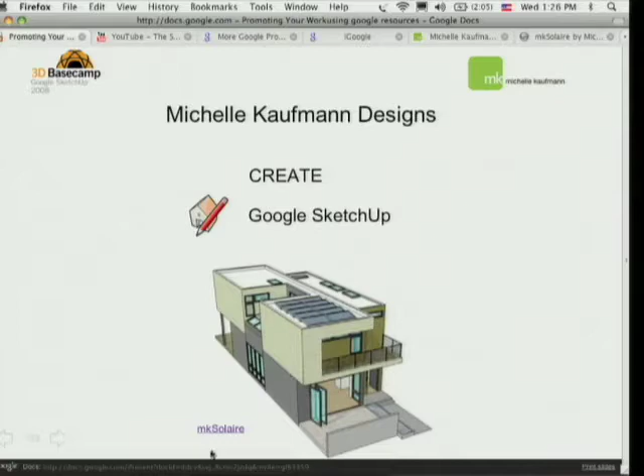But if I click through to the link, that's going to take us to the Google 3D warehouse, where that same SketchUp model design has been uploaded.

I had a conversation actually just a couple of days ago with an architectural designer who I met from Sydney. He had mentioned that one of his hesitations about the 3D warehouse was in terms of giving up his firm's little secret design sauce. There were some intellectual property concerns there that he had.

So I actually also wanted to go ahead and open up this SketchUp model within the 3D warehouse. Just a quick peruse through in case any of you guys haven't seen the warehouse. The 3D warehouse is an online repository where anyone can upload SketchUp models. Anyone with a Google account can upload SketchUp models, and anyone can download SketchUp models.

Here's the little download link that would allow us to download this SketchUp model in SketchUp version 5 format. There is also a place for you to add a description for your models and then some tags. These are all of the searchable keywords that allow you to easily get from theme or from model to other model.

So if I go back to this page, I can download the SketchUp model. I actually already have the SketchUp model downloaded, so I'll just open it up here in SketchUp. Where did it go? I have it open probably. There it is.

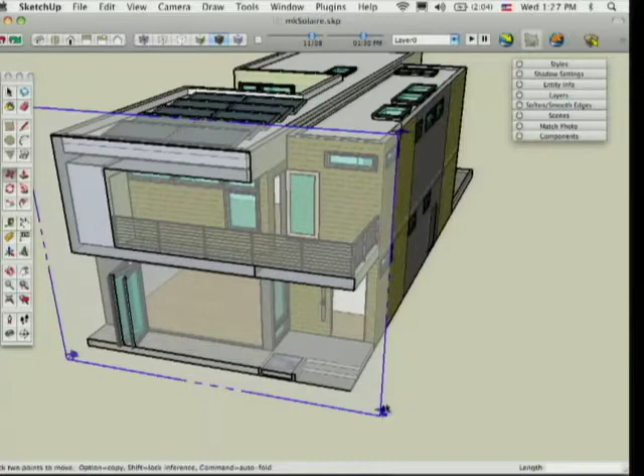I'm just going to turn the shadows off so that I can orbit a little bit faster. And then here I just wanted to take the section tool and cut a quick building section through the SketchUp model just to show you guys that the SketchUp model isn't really giving away anything in terms of construction details or architectural detailing.

It's really just a shell model that's intended to give potential buyers or customers an idea of the space, the internal spaces, the exterior design of the model. In a lot of cases, other folks create strictly exterior shell models where they haven't even modeled the interior walls in detail, or the windows are a lot more two-dimensional. But in this case, it's a really great SketchUp model that allows people to get in and really test drive it.

That's her little catch buzzword, she likes allowing people the opportunity to test drive these models and test drive the designs. So here I clicked the place camera tool, and we're actually inside the SketchUp model taking a look through some of the different stuff. So that's creating content using SketchUp, and now we're starting to look at one of the options in terms of sharing that content.

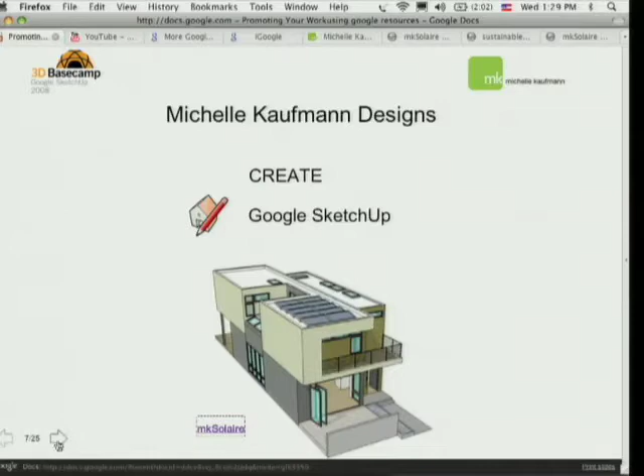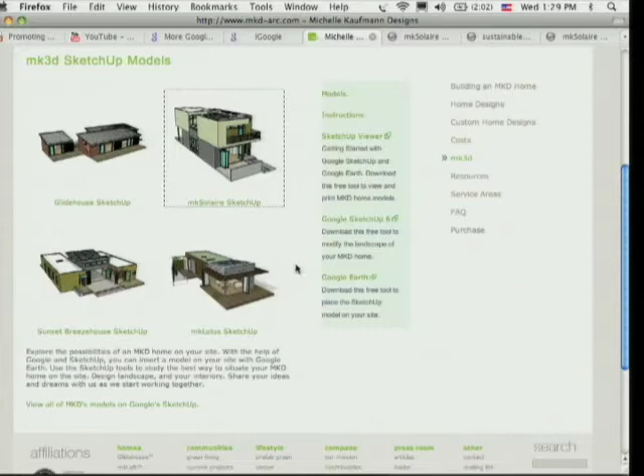So the 3D Warehouse, first and foremost, but then also YouTube, Google Maps, and Blogger. So if I go back over to her website, we can also take a look at the videos that she has posted.

I think there's one on the MK Lotus page. And in this case, when you click on the videos, you'll notice that all of the different videos are YouTube videos that have been embedded on the website.

And if we click through any of these videos, we can either watch them directly on the website or open them up in YouTube.

In this episode of the SketchUp Show, we'll show you how an architect and a product manufacturer are using SketchUp to tackle one of the Green SketchUp Show episodes we produced about Michelle Kaufmann's MK Lotus home, which was on display last November in San Francisco at the West Coast Green Conference and Expo. We're going to introduce you to the MK Lotus home designed by an architect.

So if I pause that and then jump back over to YouTube, take a look at her page on YouTube.

And if we just click on any of these Michelle Kaufmann videos, let's click on this one. One of the cool things about YouTube also is that, just like the 3D Warehouse, where if you're looking at one model it gives you suggestions about other models you may be interested in.

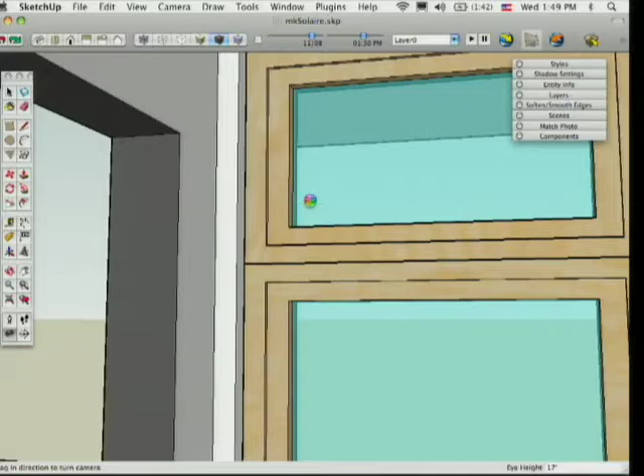If I go back over and grab their model and download that—that one's a cooler looking model. Once that downloads, open it up. And there you go, this is the SketchUp model.

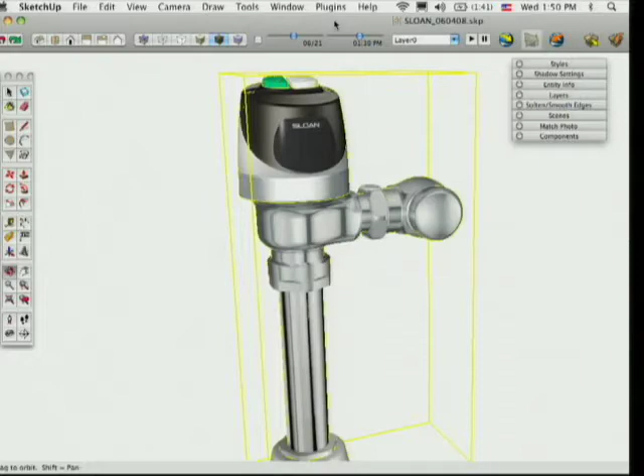The textures were projected from a photograph of the product. I'm not sure, maybe they'll cover that in the photography tutorial happening later, but this is just something we like to do with a lot of our products—building products we put together include the photo textures so it really looks like a more realistic, three-dimensional version of the model.

If I skip back over to Acrobat, I just want to open up the PDF we did for the 2008 products. This one's going to take a second to upload probably because there are so many 3D models embedded in it, but I just wanted to show the 3D files we put together for this year's issue.

So that same straw bale wall panel—here we are in Acrobat, able to spin that around as well. All of these snippets will end up being included in the PDF. From the PDF, they'll all link back to the Warehouse, and from the Warehouse, they'll all link back to either the Sustainable Industries website.

So it's a good way for them to promote the work they're doing with their magazine. But since we're uploading the content as Blue Marble Project, it's also good promotion for us as the authors. People can click on our name and see some of the other collections we've put together and other models we've created for the Warehouse.

Question: In building the Adobe file, are you using Adobe Acrobat, the 3D version, or just any Acrobat? I have Acrobat Pro 8. Acrobat 3D has other tools that allow you to pull models apart, create little animations, and stuff like that.

For what we're doing, it's just a straight copy paste from the 3D PDF that's generated using the SketchUp plugin. From there we copy the 3D file and then paste it into a new PDF document.

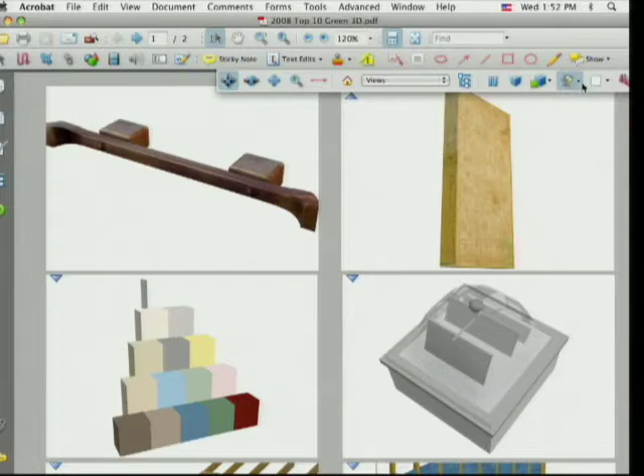We just did a quick WebEx with the guys at Sustainable Industries to show them that process of copy pasting and resizing. The only other thing you want to take a look at in Acrobat is the lighting for each model, because with the lights off it looks pretty dirty. But if you get the right lights in there, there are all kinds of different lighting settings, so it's really just a matter of playing with the lighting settings and then creating a default view so that when the model opens, it remembers those lighting and view preferences.

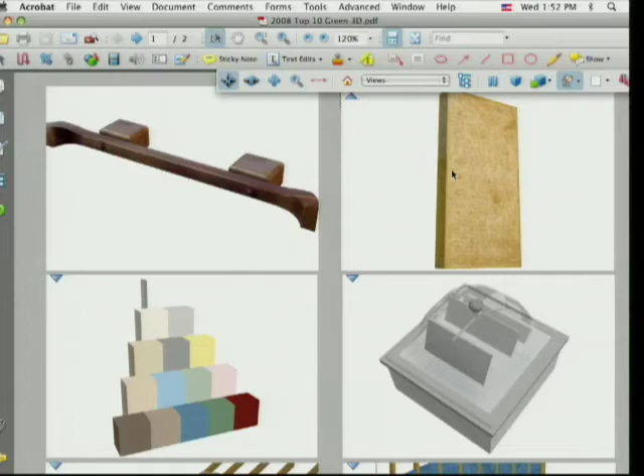We're hoping this will be a really cool interactive way for a smaller trade publication to show how nimble they are in terms of adapting to new technologies and allowing their advertisers to get involved as well. It's of great benefit to the magazine, to us, and to all of the products that were selected.

Green Design Systems barely has a website, because their products are so new and they're really trying to focus on what's important to them, which is the quality of their product. For us to come in and get hooked up through a company like Sustainable Industries and help them out, now they've got information about their products on the 3D warehouse, and available in a 3D PDF format. Compared to the stuff they're using to send out as product literature to advertise to folks, this is going to be really exciting for them as well.

Most of the feedback we've been getting from these building product manufacturers has been really positive. This is a compressed earth block company, so we actually put together a whole SketchUp model that shows how that earth block product is installed.

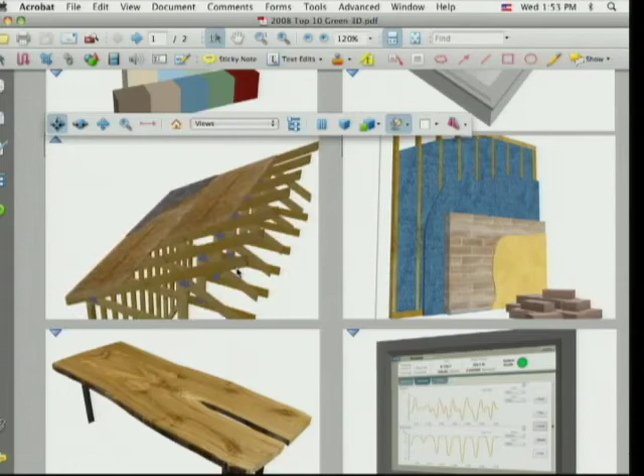The same is true with this plywood product, manufactured by a company called Thermostrand. It's a radiant coating that's put on the underside of the plywood to get energy back into the house so it's not all leaking up through the roof. So that was a really cool product.

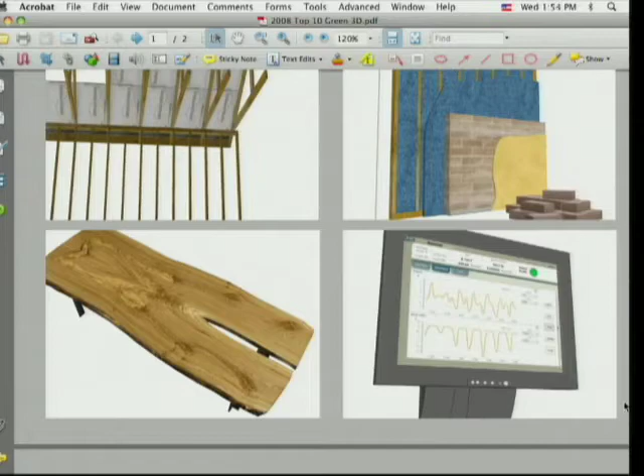Urban Hardwoods, reclaimed timber. This is a company called Agile Waves. They have software that tracks energy use in real time in your home. A lot of the work we were doing for this was just looking at how do we even represent a product like software in SketchUp, and then get information about it out there for people to consume and play around with.

For some of the more two-dimensional products, it was definitely a challenge, but there were some cool ideas. This is a paint company, so we were really kind of at a loss for that.

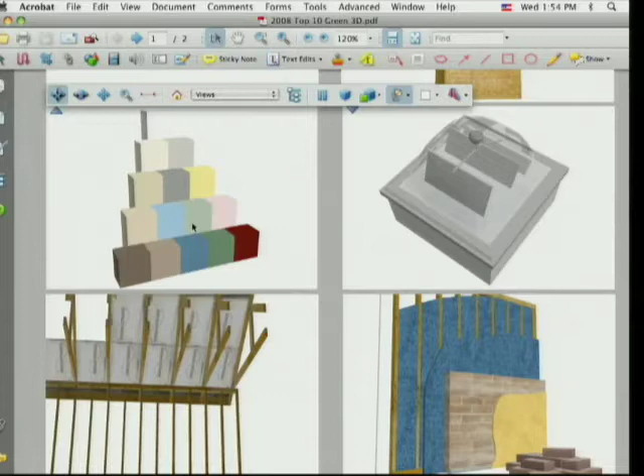But the great thing about this model is that all the materials... actually I'll just open it up real quick. Sorry, I'm going off on some SketchUp tangents, I'll pull it back in here in a second. This was just a really fun product, or a really fun project to work on, so I'm kind of excited about it.

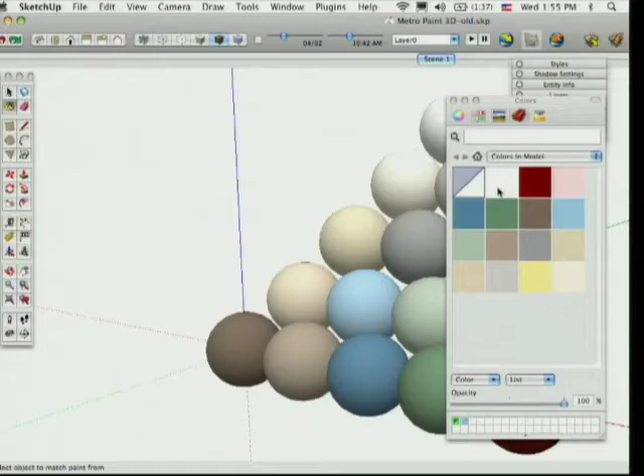So in the material library, all of the paint samples are named properly based on the paint color in their swatch library. We get a lot of questions about this from companies with more two-dimensional surface-oriented products, like countertop materials, paint colors, wallpapers, or tile, like glass tile, where it wouldn't make sense to really model one tile in 3D.

It would make more sense to put together a material library, and talking to people about how they would go about that. So in this case, the paint colors are all represented in 3D in a SketchUp model, just so you have something fun to spin around.

But the real value here is the ability to go and duplicate the material library for this file, which I've already done, so I can just go to the Metro Paint material library, and there are all those same paint colors that anyone would be able to open. So having access to that file, and now having it saved in your SketchUp library for future use, is actually really helpful for people who want to potentially specify this product in their project.

Close that and close this. Yeah, that Sloan PDF came out really nice too, so I'll just open that up real quick. If I have it... I don't think I have it. Oh wait, it might be in here.

Is it? Nope, that's the ugly one.

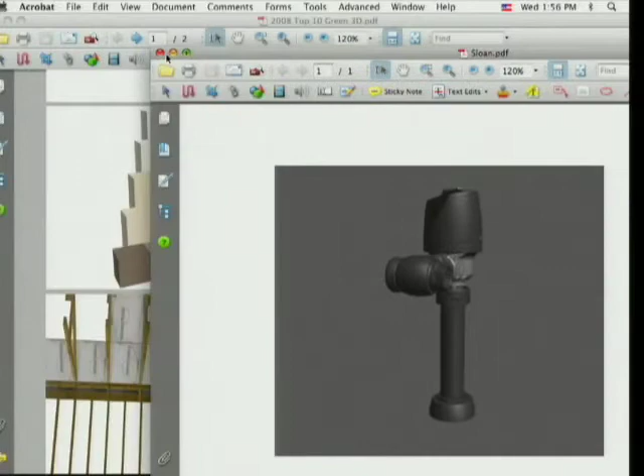Anyway, you'll see it in the magazine. Keep an eye out for the top 10 green issue on Sustainable Industries website, because it's another cool example of this stuff in action in a different way.

If I go back to the presentation, these are the applications we're using. We're looking at SketchUp as the content creation aspect of this. There's a link here for when you download the presentation later that takes you to the Sustainable Industries collection on the warehouse.

In terms of sharing it, the applications we're really focusing on are the warehouse. With some of the geo content we're creating, people can see that content in Google Earth. There's another aspect of our presentation that'll touch on that quickly.

Lastly, I wanted to talk a little bit about some of the secrets about how the warehouse becomes really useful for you. To do that, I'll quickly go over to a new Firefox window and type in...

Kohler Escale toilet - I'm a really bad typist when I'm not paying attention. One of the links that's going to show up, about 1, 2, 3 links down, is the link to the 3D warehouse.

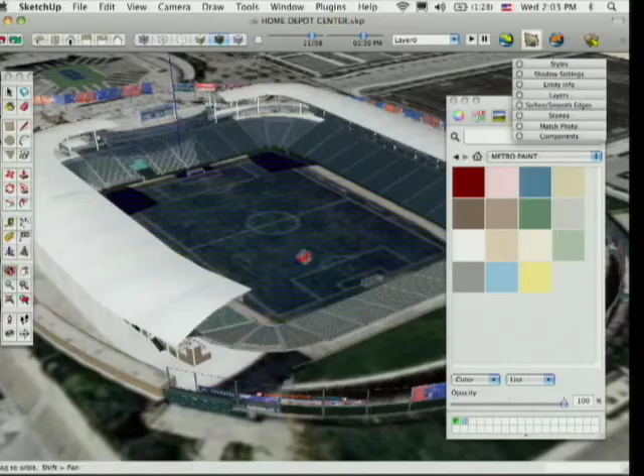Going back to content creation in SketchUp - this is a SketchUp model of the Home Depot Center, which we also uploaded to the Warehouse, just like everything else. If I go over into SketchUp, I can open up that model just to take a quick look at it.

With this file, we used it during one of the episodes of our SketchUp tutorial podcast, called The SketchUp Show. We used this model in particular to promote the Logitech 3D Connexion device, which is a cool little 3D mouse - I don't have one here with me. But if I go back over to Firefox and look at our presentation on the next page, I do have a link to the YouTube video we uploaded for that particular episode.

Going back to YouTube, in addition to having this video there, which is an episode of the SketchUp Show, over in the right-hand column we get all kinds of other SketchUp-related content.

So that was the SketchUp Show episode we did where we were showing the Logitech mouse and that same SketchUp model. And here on YouTube, same kind of thing.

When you're working with YouTube or with Picasa, as I mentioned earlier, those same types of techniques apply in terms of the description, the searchable tags, and how that information is organized - the collections. In this case, we've got our SketchUp page on YouTube, our account, which has all of our videos loaded.

In the bottom left-hand corner of Google Earth, there's a bunch of checkboxes here. For folks browsing the Earth, if they have the 3D buildings layer checked on, they're going to have the ability to have these - just like in the maps where we had all of our buildings getting sucked onto the map and then there was an icon for them.

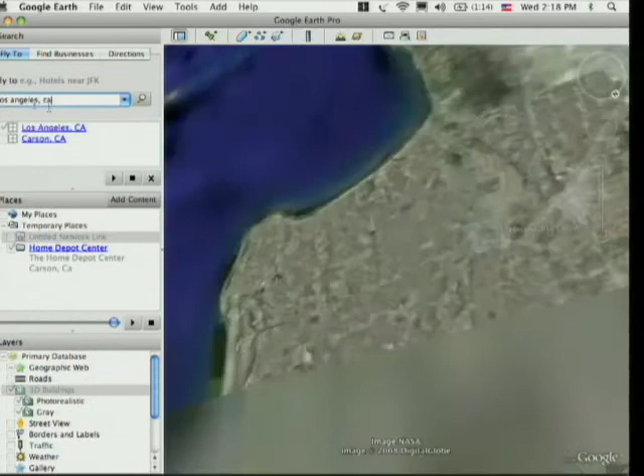I'm going to zoom out here. We're in Carson right now in Google Earth, and I'm going to come over to Los Angeles to get downtown, which is nearby, so it won't be too far of a Google Earth flight. So if you go into Los Angeles, you'll notice that with the 3D buildings layer checked on, once I get a little closer here, we'll tilt so we can see the buildings that are naturally coming up in Google Earth. Zoom in a little bit.

You have the 3D buildings layer checked on here—why aren't my 3D Warehouse icons popping up? It'll show up once it loads. Yeah, it looks like our connection is just a little slow, but what you'll notice is the buildings that Google loads up automatically in Google Earth will load, and then some of the other buildings that aren't modeled currently will start popping up with those little house icons like we saw in the 3D Warehouse. They'll get served automatically from the warehouse.

So whenever you upload models of things you've got that are geolocated in Google Earth, folks will be finding them on the Warehouse, in Google Earth. And as they're finding them, they'll click on them. If you have the information loaded in there in the Warehouse—the description, all the links back to your site—everything carries through into the information bubble. I apologize that they're not coming up here at the moment.

Bummer. Thought there'd be a better web connection here.

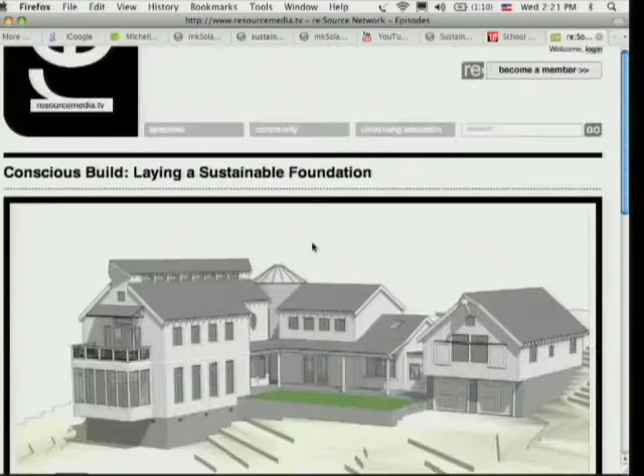You guys will recognize that as being a SketchUp image. So what we're doing here in terms of content creation is using SketchUp to create 3D models of case study projects—other projects that architects have designed or are working on or building. We create models of those projects in SketchUp format, use the SketchUp models for all of our motion graphics, and we're creating all of our animations for the show in SketchUp and exporting those to use in the videos. And then also uploading those models to the 3D Warehouse.

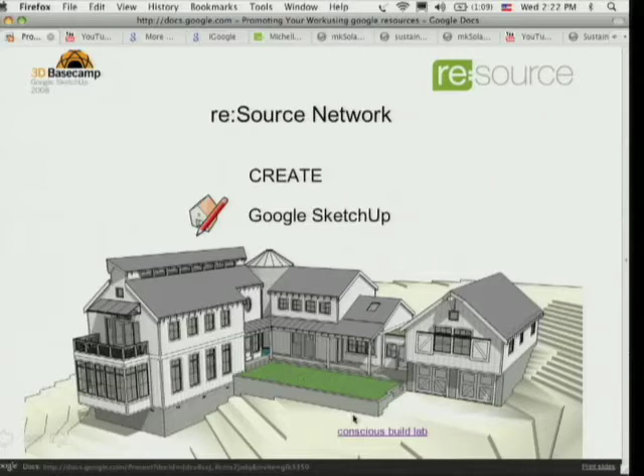So in this case, one of the central projects we're looking at throughout the site is a project being built up in Arroyo Grande, which we've called the Conscious Build Lab. It's a sustainable home that's being built up in Arroyo Grande. If I click on the link here, I go back to the 3D Warehouse where anyone can download that particular model, look at it on their own computer and check it out.

If I click over on the collection—and this is another aspect of the 3D Warehouse that's important, I was waiting until now to talk about it—if I click on that collection, we can go back and see the other case studies that we've covered in Resource so far.

So these are other SketchUp models that either we or in some cases the architects who designed and built the homes already had available. We're putting those SketchUp models up on the warehouse. And in addition to entire buildings, we're also putting up sustainable design systems.

In this case, fly ash - a little animation that shows how fly ash is collected from carbon, coal burning energy plants. If I back up here a second, go back over to the case studies - we've also included systems in some of these models.

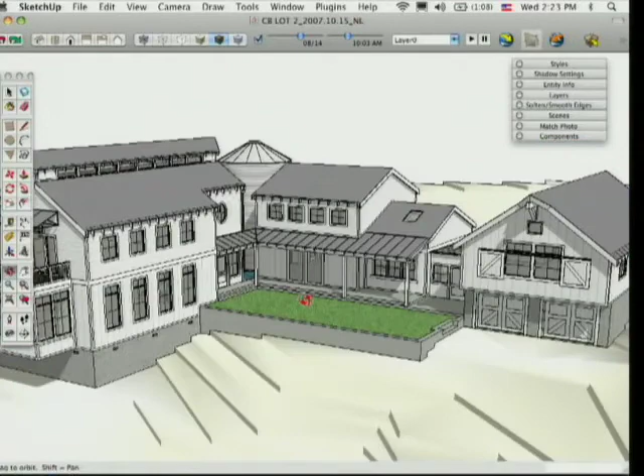So in the Conscious Build model, which I have in SketchUp, we've also done quite a bit of work creating SketchUp models of the radiant floor slab and how that radiant floor system works, so that architects and designers who are interested in using that information can incorporate it into projects they have going on.

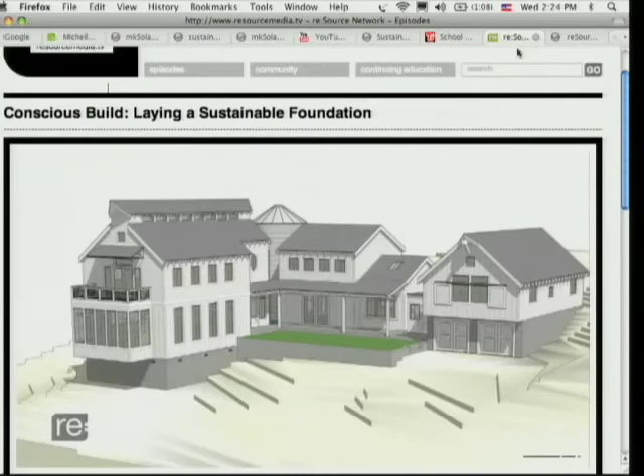So this is one of our newest things, and a lot of it is still in progress, but if I go back over to the website, I just want to click on the video and see if I can get it to download fast enough. And if not, I have the QuickTime version.

I design and build luxury homes, and I'm choosing to design and build them green and inspire other people to do the same, to show that it's easy to do, that it's inexpensive to do, and to dispel the misnomers about what it is to be sustainable.

So that's Matt. He's the real estate developer who's building the home up in Arroyo Grande that we're documenting for the show. But I just want to see if we can get the SketchUp model up here soon. Hi, I'm Matt. Let me scrub through.

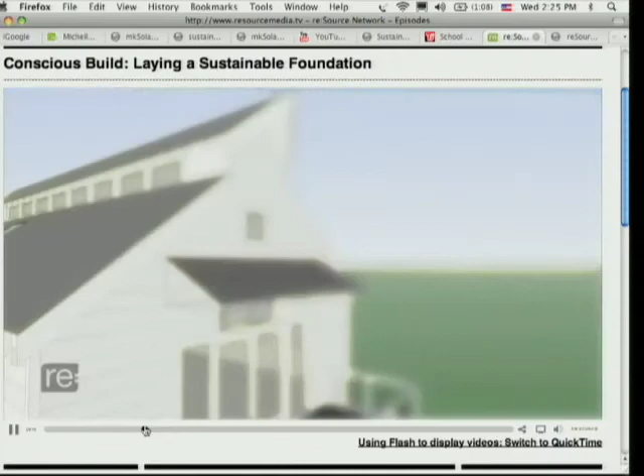There it is. So within the videos, we're exporting SketchUp animations and then including those as the motion graphics for the show. It fits perfectly into the landscape here, and it's a cluster of barns, actually, connected with some glass walls. So that's one video in particular about the home itself.

There are other videos that talk about the radiant heat flooring installation. And with that video, we've also got a SketchUp model specifically of the radiant floor system. So we're including a lot of that stuff in there as well.

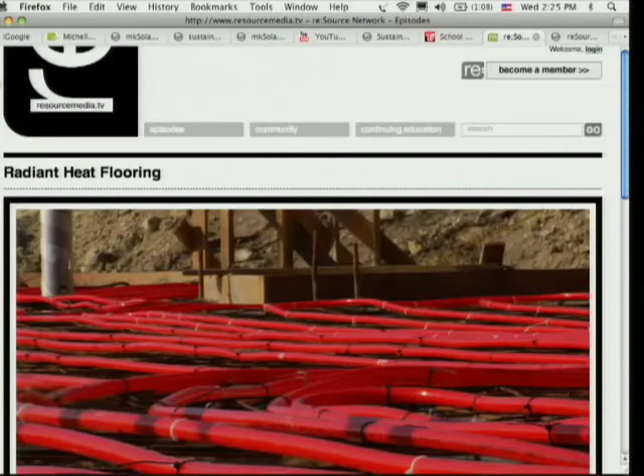And then all of these videos, in addition to being on the website and being distributed through iTunes and being posted to Facebook, are also obviously on YouTube as well.

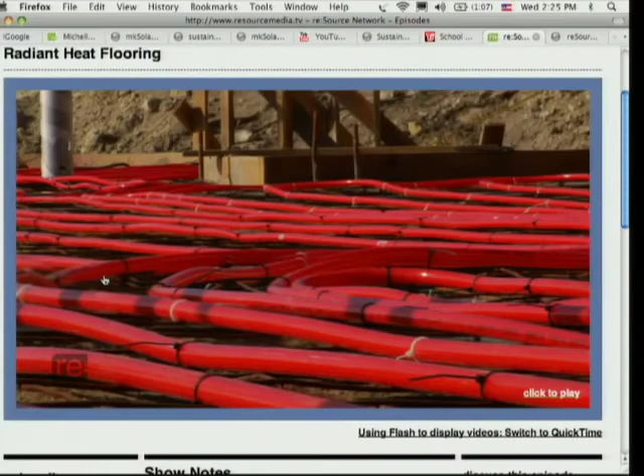A lot of work in this project with Google Docs, using the Google Doc program to create scripts and type up all that information and share that, and also spreadsheets that have all of our production shoots scheduled, and the contact information for all the people we need to get in touch with to interview on the project.

In addition to having information about sustainable systems, the Resource Network also interviews a lot of experts in the sustainable design field. So there's lots of really great high quality information there. But again, all of it incorporates SketchUp and the warehouse and YouTube to get that stuff out there for people to check out and consume.

So I think Alex was going to talk a little bit about some of the YouTube aspects related to what we're doing with Resource. Yeah, so the last thing, and it's something we touched on earlier - our biggest successful thing, that we probably get the most out of, is people finding our videos, not necessarily us first. So YouTube is a great place for that.

On the YouTube site - and I'll just touch on this quickly as we run out of time here - we've posted the trailer to the YouTube site now. There's a few things to note: when you look at the trailer at first, it's going to look kind of junky and garbage.